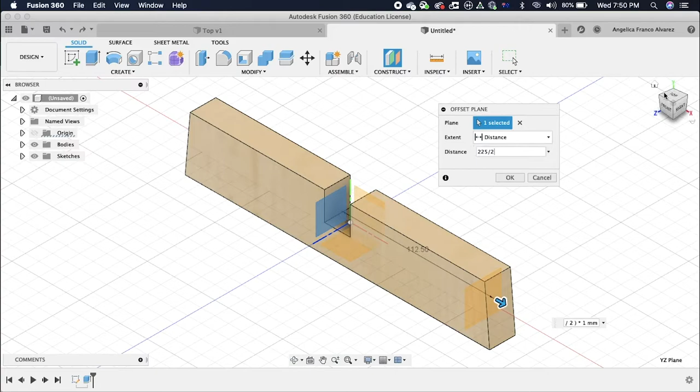When I type that in, it gives me the exact distance, and I can check that if I go to the front view, I can see that it aligns perfectly with the edge of my cross rail. So I'm going to hit OK and go to the home icon, click on it, and I can see my offset plane ready for me to work on.

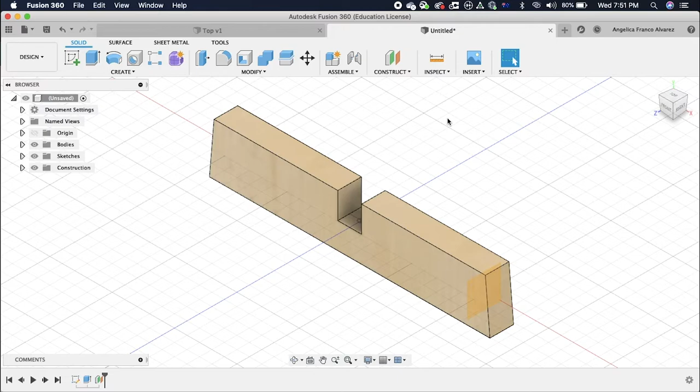So what I need to do next is click on the create a sketch icon, then select the offset plane that I just created, zoom into the shape so I can work on it more comfortably, and I can do that by pinching in and out on my trackpad as I would use a phone or an iPad.

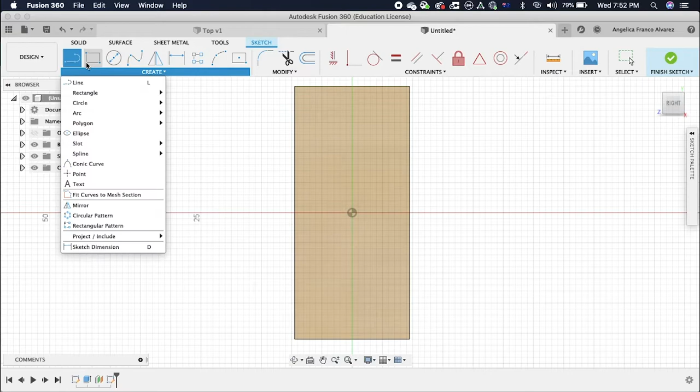I'm going to click on the line shortcut tool. If you don't see the line shortcut tool there, you can click on create, and the first option is your line. Click on the line tool, go to the middle green line and make sure you're on the edge of the shape, then go down 10, then 22, go down another 10.

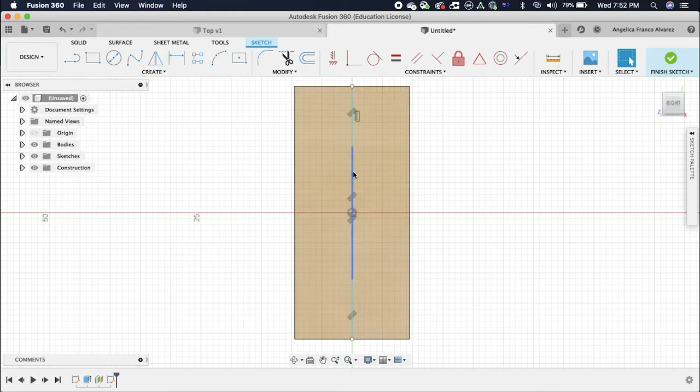Once we have completed that, the line still keeps going, but I want to get out of the tool, so I press the escape key on my keyboard. Once I press escape, I can go into the middle line, click on it, and then press delete.

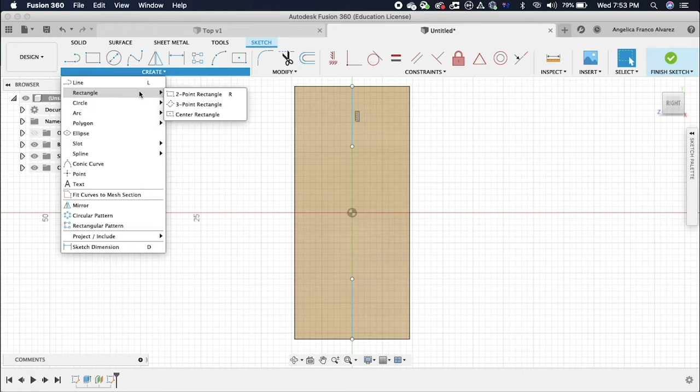I can now draw my dowel perforations. I'm going to click on the center diameter circle shortcut, which is here on my workspace. If you don't see it there, you can always go to create, go to circle, and then select the first option, which is center diameter circle.

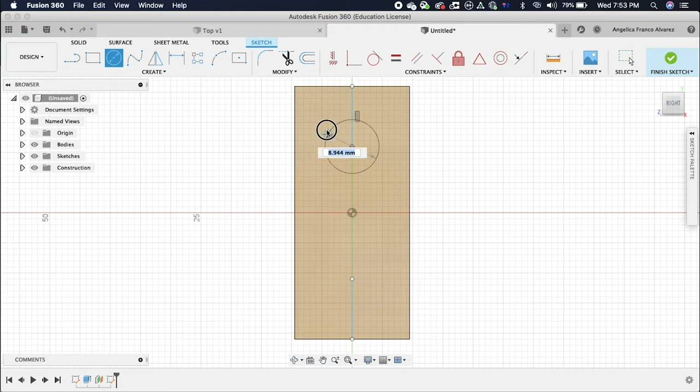You are going to come to the end of the top line, and there is that white little dot, and we're going to click on that dot as a reference point for my center, and then drag. We're going to release and type in the exact measurement, which is 10.

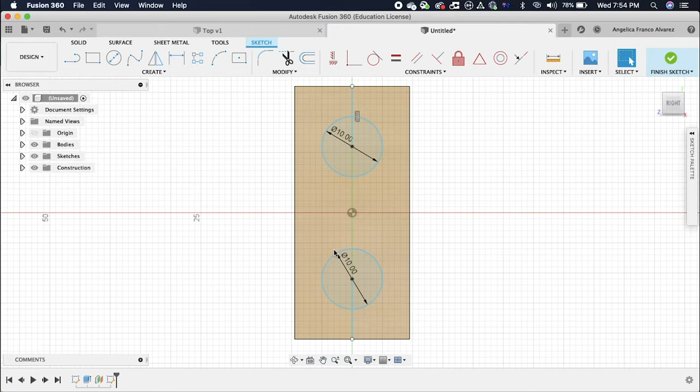And we're going to repeat the process for the bottom. Click on it, click on the white dot, drag out, and then type 10. Make sure you drag out and release the trackpad. Don't click, just release, and then type in the measurement and press enter.

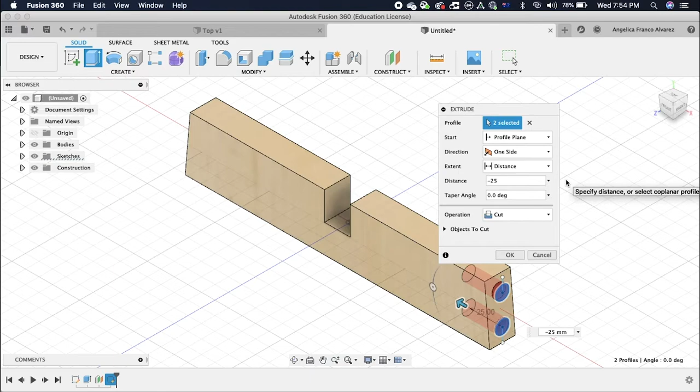Finish the sketch. I'm going to click on the extrude tool, select the two profiles we have created, and then I will just go to the navigation box and click on the home icon so I can see things better, and then push that backwards, and that's going to be 25 millimeters in.

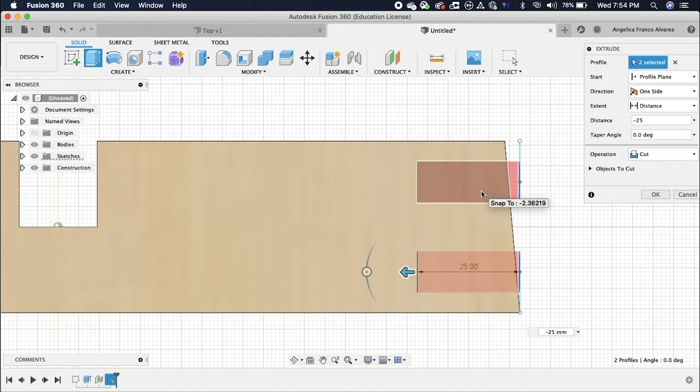Then I can just see what's happening. If I go to the front view, move this window to the side, I can see where my drawing is located on a straight angle on that plane, and I'm coming into the perforations 25 mil. Click OK, and if we click on the perspective view, home view, then I can see that my perforations are done.

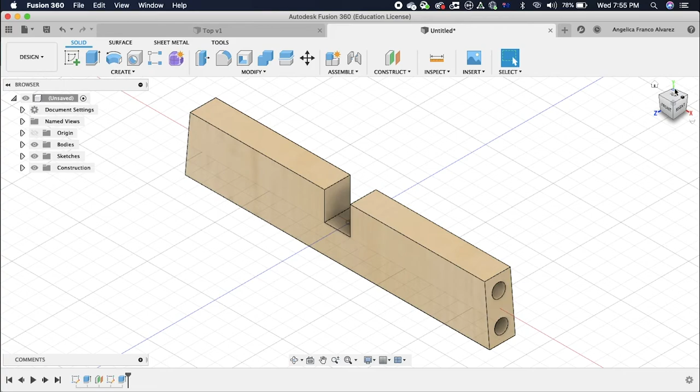To do the other side, I'm going to repeat the process, but in this moment, I'm in this view, and I'm going to hover across the navigation box and click on the opposite side.

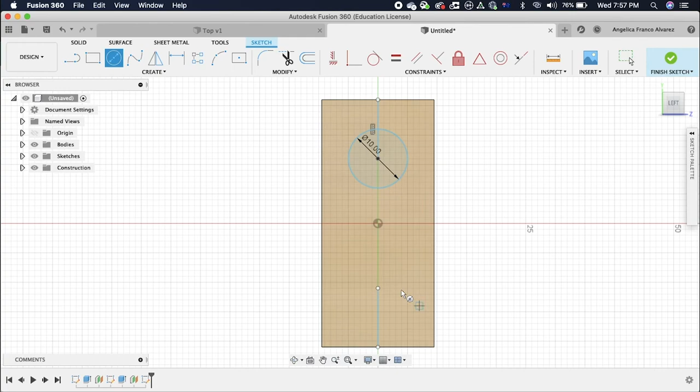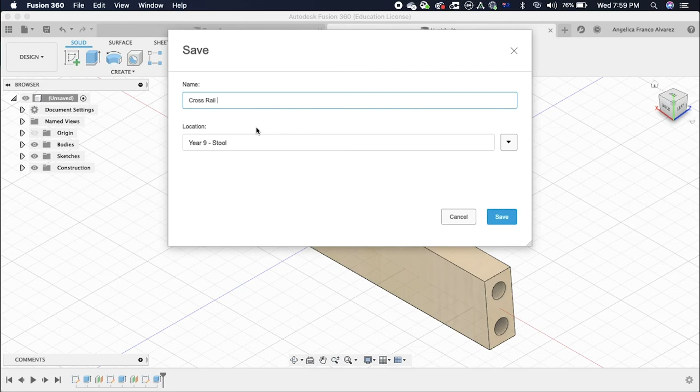So I'm going to save this document and name it Cross Rail Bottom, and then save.